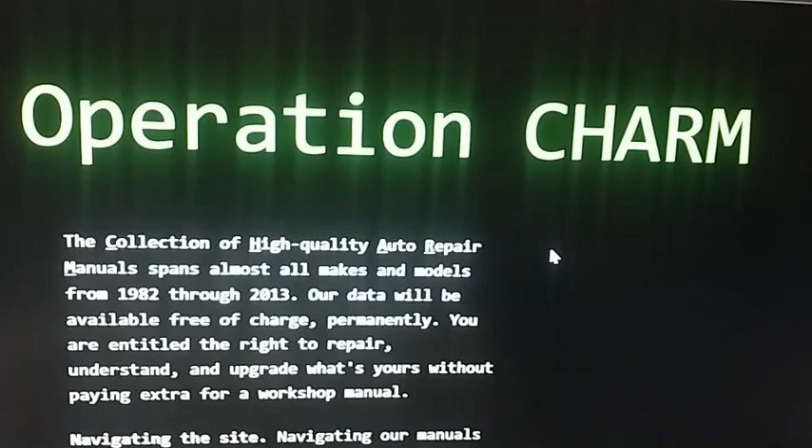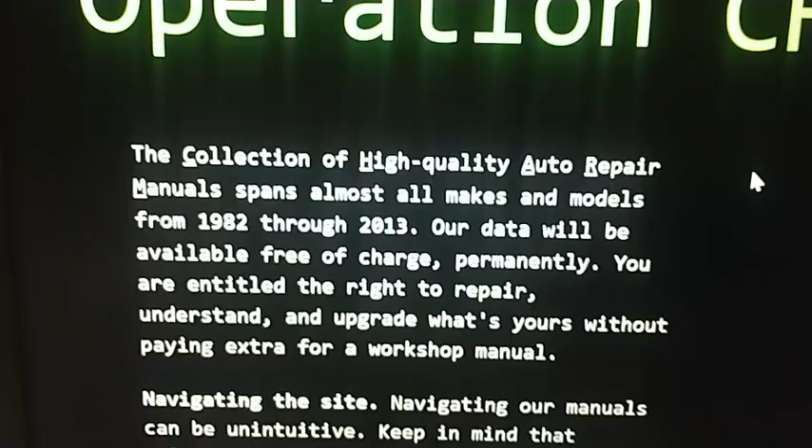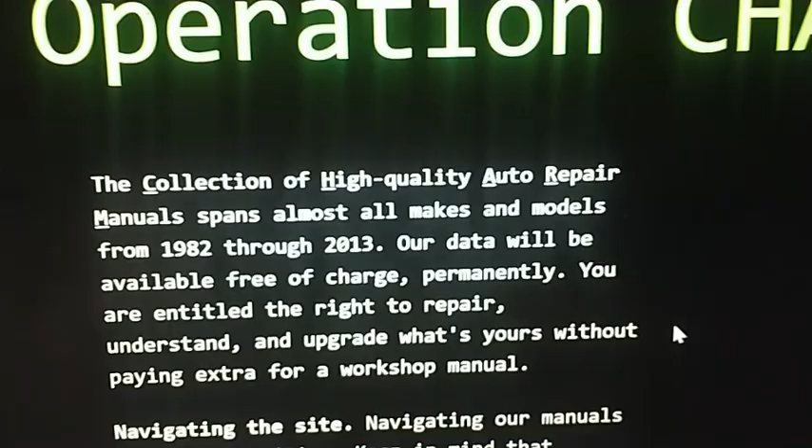It's called Operation Charm. There's your website right there, charm.li. Put that into your Google search and it'll come up, you can click on it. Operation Charm: the collection of high-quality auto repair manuals spans almost all makes and models from '82 through 2013. Our data will be available free of charge permanently. You are entitled to the right to repair, understand, and upgrade what's yours without paying extra for a workshop manual. I mean, right there says it all. You can read through all this, and you can download stuff. So we'll go in here and I'm just going to run you guys through it.

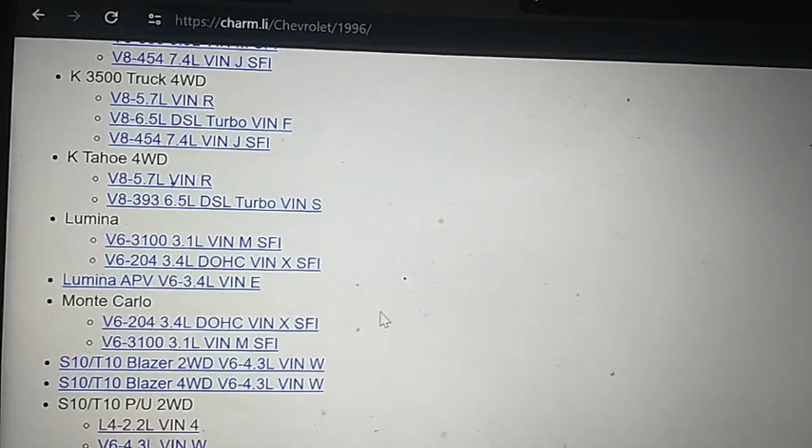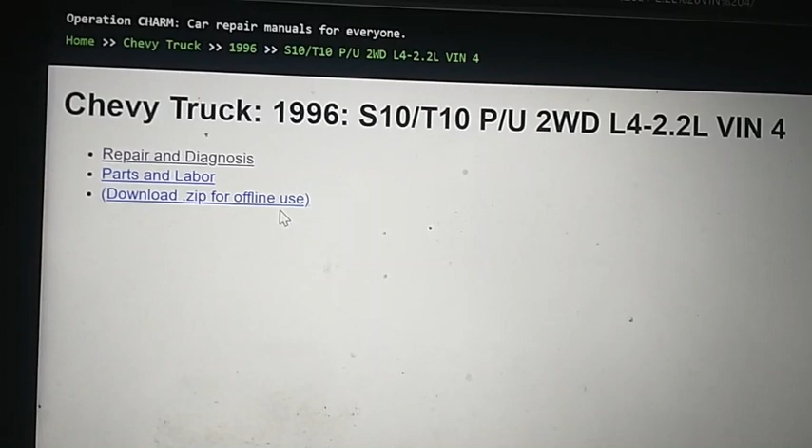You can see there's about every make and manufacturer a guy could want. I'm going to go back up here. I've been working on my kid's '96 Chevy S10, as you've seen lately, there's a video on that. This is just a '96. So, repair and diagnosis, parts and labor, and then you can download the whole thing to use like when you're working on the vehicle. You can access it from a cell phone, a laptop, a tablet. I have a little beater laptop I use right at the vehicle. So we'll click on repair and diagnosis.

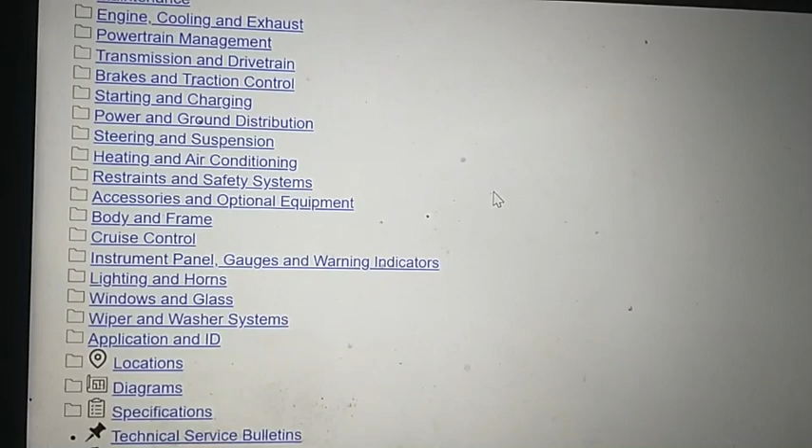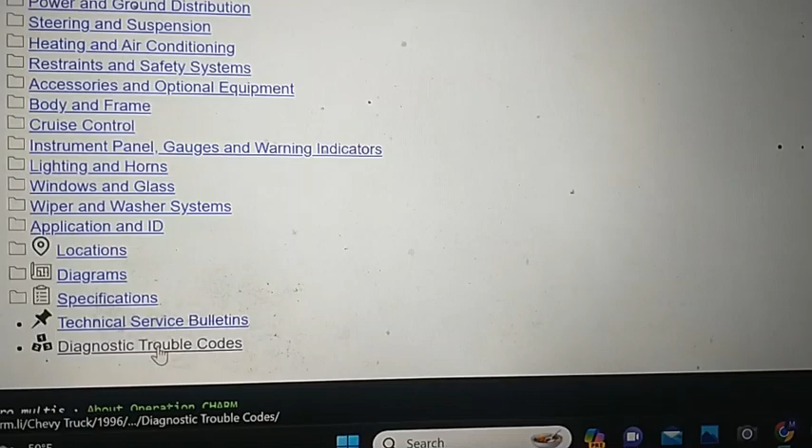You can see all the stuff that's available. It's got TSBs, all the trouble codes. I mean, the diagrams, this is all factory service manual stuff. Testing and inspection, P-code charts, P0107. This breaks it down, and here's the circuit, here's the diagnostic flow chart.

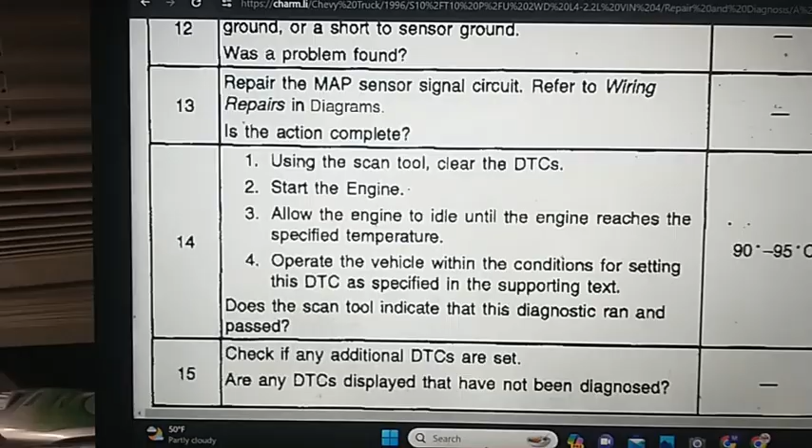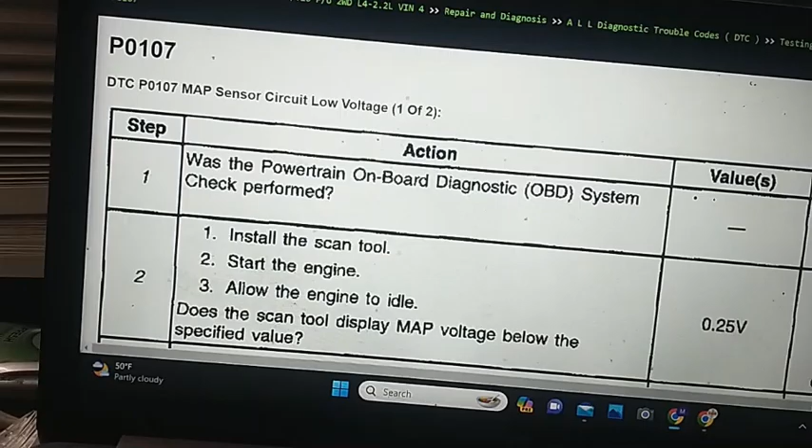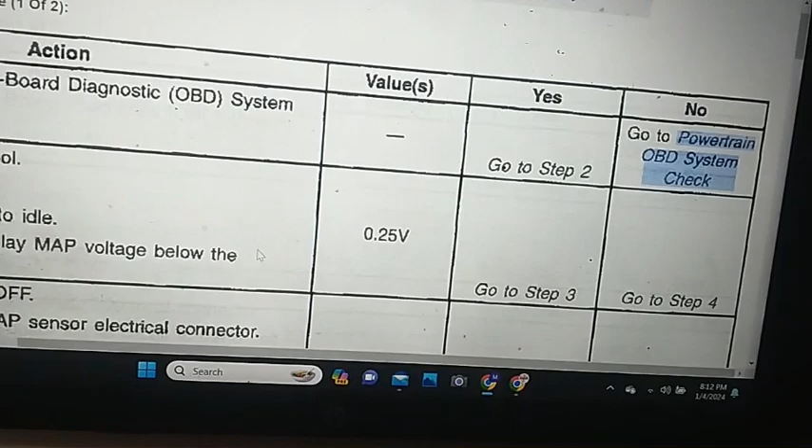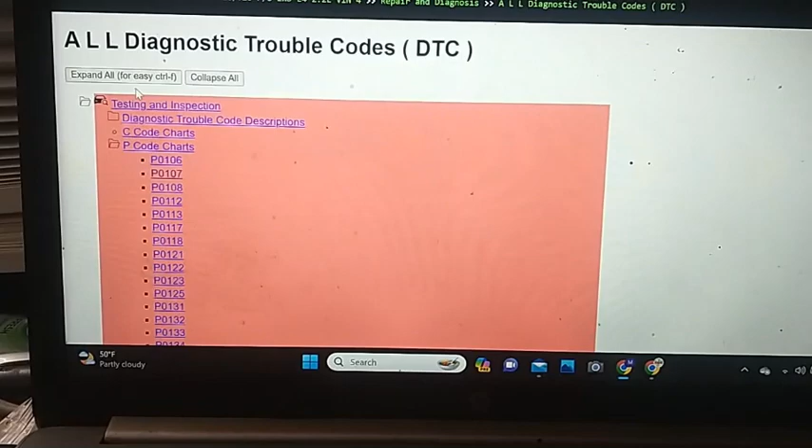Scroll all the way up here, start at step 1, yes or no. It gives you a value, like a quarter volt. I'll scroll over here. If yes, go to step 2, so on and so forth. This is valuable information, and it's on every make and model from '82 to 2013. Actually, with this I finally diagnosed what's wrong with my son's S10, I'll be doing a video on that.

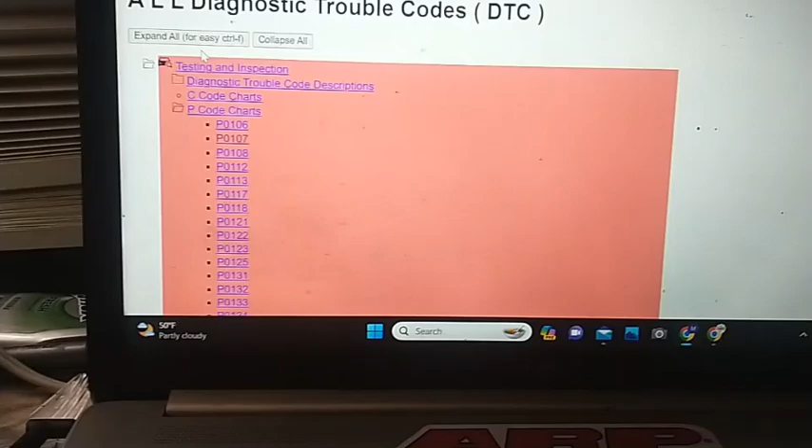This isn't like hot rodder type stuff, this is repair on your own vehicles, your regular daily driver type stuff. If you have a shop, you can get into customer stuff. I mean, it's endless. So let's just, I want to see.

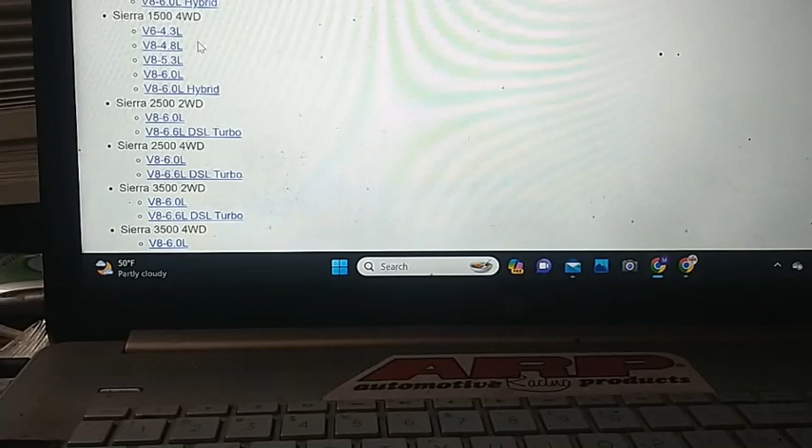I got to pull an engine on a 2009, actually that was GMC. I'm going to be doing a cam swap and reseal on a 2009. I got to go back to home, okay, 2009 GMC, and I'm just curious, let's see, it is a Sierra 1500 four-wheel drive with a 5.3. Parts and labor, let's see, labor, engine, maintenance. Where's the engine at? Powertrain, management. I'm still learning to use this, so bear with me.

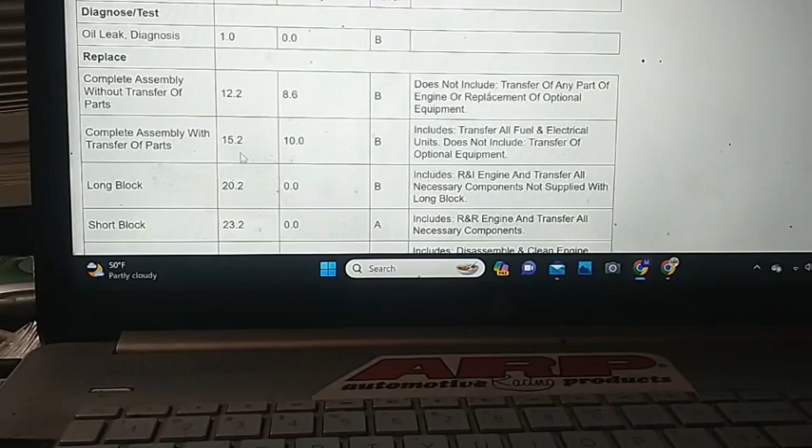Oh, engine right here, engine. See if it says specifically for removal. Probably does, labor times. Complete assembly with transfer of parts, transfer all fuel and electrical, don't include transfer of optional equipment: 15.2 hours.

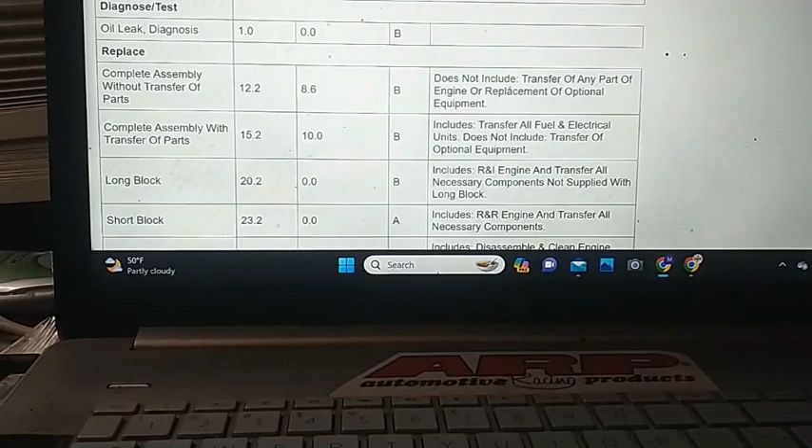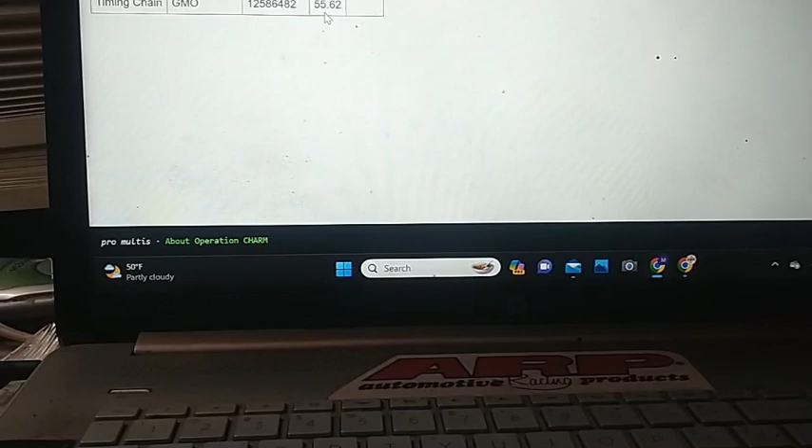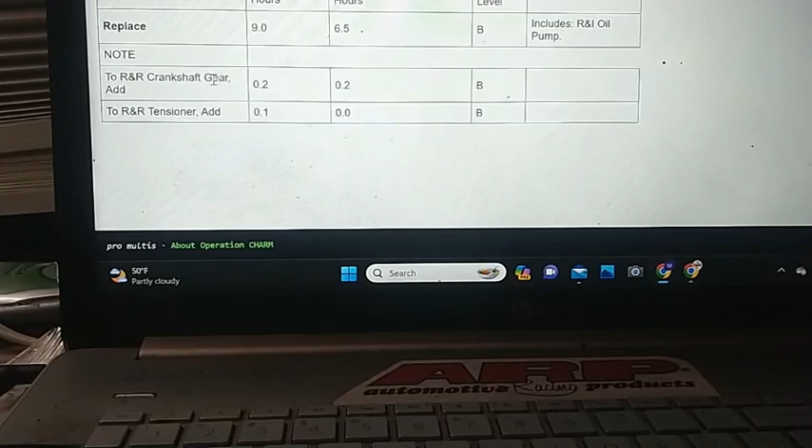Parts information, there's all kinds of stuff in here. Timing chain, let's see what that shows. Parts information, labor times. Gives you a part number and a factory price. I don't know, I mean you have to take that info from there, but replace timing chain: 9 hours. To R&R crankshaft gear, add 0.2. This is on and on and on, and this is all factory manuals.

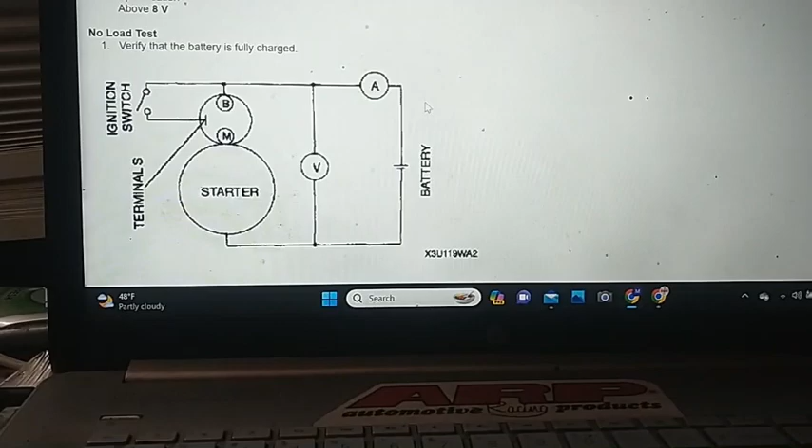Let's go to Mazda, let's go something within the last 30 years. I'll just click on anything here, repair and diagnosis. Starting, let's go there, let's go. Starting system, starter motor, testing and inspection, removal, installation, disassembly, assembly, testing and inspection. Here you go, walks you through everything on that particular vehicle.

So anyway, just want to show you guys this again. It's charm.li, just put that in, you'll see it, it's Operation Charm, right there. Operation Charm, car repair manuals for everyone. I don't know who puts this out, but feel free to use it. It was free to me, I'll pass on the information.